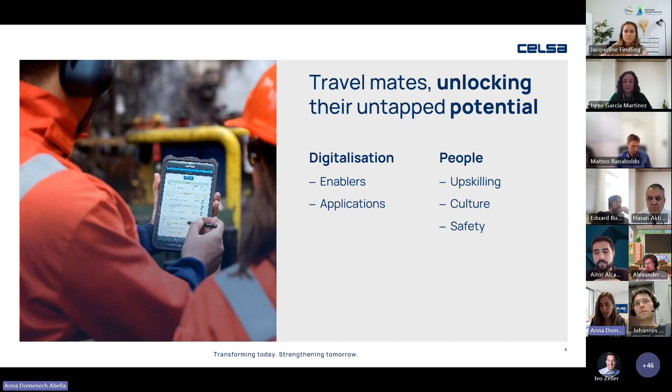But today I will focus on the other travel mate, which is digitalization, and what are the challenges we face there in this sense, and what are the opportunities it brings.

So if we look at our process, that's important to understand our digitalization strategy, and I have already mentioned that. We cover these 4 steps of the value chain, and it allows us to be a critical agent to close the loop of 2 very important value chains, construction and automotive. You will see later why it's important.

So we have categorized the challenges in digitalization in 3 categories: enablers, process revolution, and market disruption. I will go through all of them, but just as a first hint, when it comes to process revolution, we work a lot with melt shops and rolling mills because they are the ones that emit the most, and therefore the ones that also consume the most.

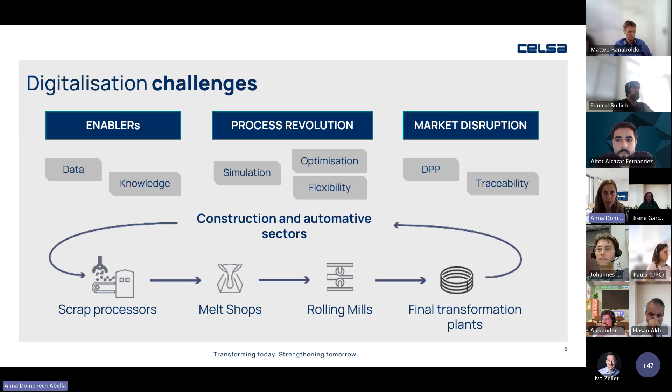So simulating new situations in which we have new feedstocks or alternative fuels consumption, optimizing the process, and also guaranteeing flexibility and adaptation in front of market disturbances is very important, more than in the other sections, in the other plants. In the contrary, when it comes to disrupting the market, traceability is very important, and the impact of scrap processors and final transformation plants is much more important because they are the end-to-end part of our position in the value chain, and you will understand it better later.

Starting now from the beginning, enablers of the digitalization for any company, but specifically for CELSA, what we have experienced in our digitalization journey is that data, this key enabler, is a tricky one. It's tricky to get the data we want, to select correctly the data that we need to extract, and also to store it in a way that later it's easy to get it and work on it.

That's one thing. And then the other one is knowledge. In some cases, at the beginning, most of all, we thought that we had to have all knowledge in the company. So that if we work on predictive maintenance, we need to define ourselves what is the software that we need for predictive maintenance, pay someone to just deliver the software and use it. And it's not the way that it should work.

We have learned by experience that knowledge doesn't need to be always inside the company. Collaboration makes things much better, much quicker, and with much more efficiency. And therefore, we have opened much more the doors to collaboration, as you see in the projects that we will be presenting today, in which data and knowledge have been key enablers and have been finally unlocked for the purpose of these three areas: simulation, optimization, and flexibility for our process.

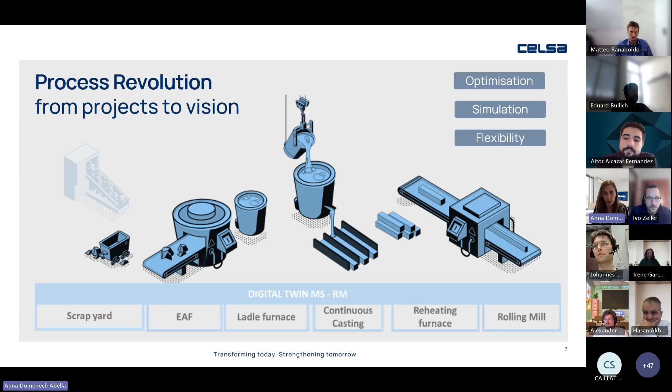Some of them are also part of the projects that we will present today, which are Alchimia, Twinghy, and Flex4Fact. If you look at it from the point of view of the three main opportunities that digitalization brings when it comes to process revolution, Alchimia represents optimization. Thanks to Alchimia, we expect to decrease by 5% the energy consumption in our factories.

Twinghy is an example of simulation. Thanks to Twinghy, we expect to understand very well what are the best blends we can use in our reheating furnace when shifting from natural gas towards hydrogen. And finally, Flex4Fact allows us to be more flexible in terms of planning and reacting to the disturbances of the electricity market.

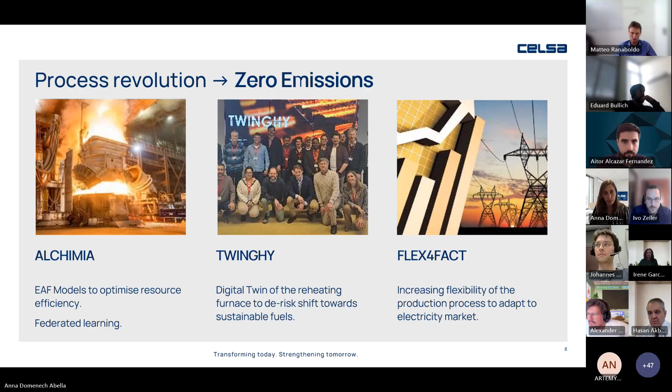And just to finish, I also mentioned market disruption. Why? Because when it comes to sustainability and competitiveness, we need to work not only from the point of view of improving the way we work, process revolution as I mentioned, but also ensuring competitiveness in the market. If the sustainable products are not more competitive in the market than non-sustainable products, it doesn't make any sense. So how do we distinguish the more sustainable rebar in the market?

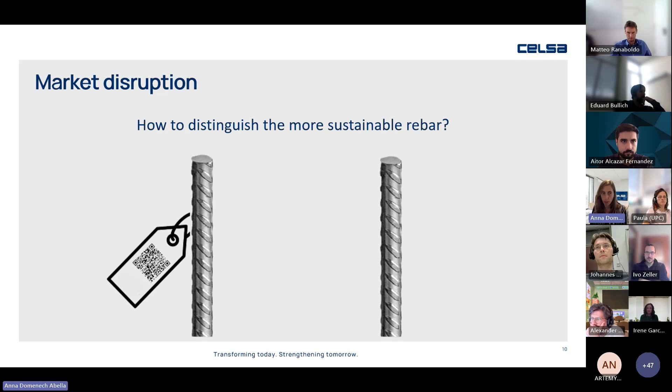Because green steel is not really green, right? Of course, the market needs to be defined by policies, by regulations, etc. But technology can also help. And this is why digital product passport and traceability is so important for us.

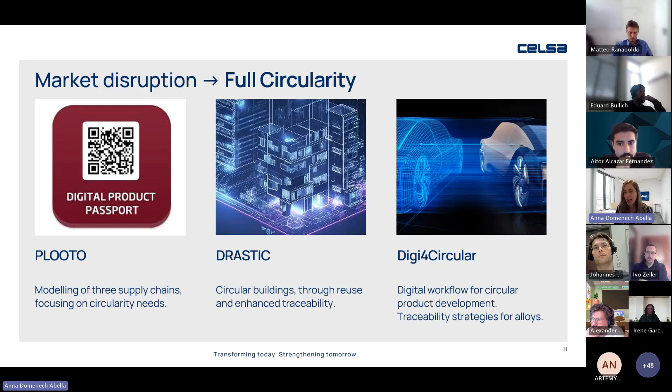So in the future, I hope not in the long term but soon, we will have a webinar on that, on the different projects we are developing in terms of enhancing traceability of the value chains and how this impacts the market for sustainable products.

So just to finish, I would like to highlight the message today, which is that when we innovate for sustainable steel, we need to think about transforming production and market as well. But today, let's welcome the transformation of the production side. Thank you.

Thank you so much, Anna. That was a really nice presentation about the doings of Celsa, and I'm quite impressed that you're so on the forefront, especially in the steel industry, of innovating and really working on making it more sustainable. And I'm really looking forward to hearing the projects now, and I hope you are as well, to dive a little bit deeper into their different approaches and how this is supporting your innovation agenda.

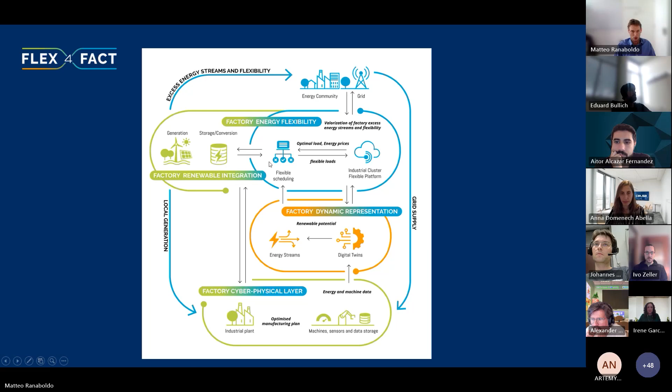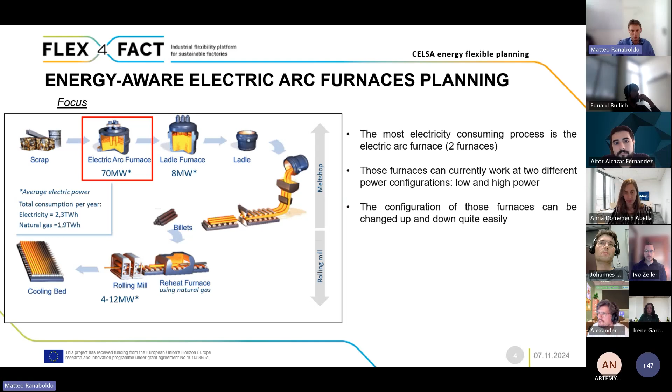Analyzing those processes, we see that there is certain flexibility, because those furnaces can work in two power configurations, low and high power, and these configuration changes can be done pretty easily by the operators and workers of the industry.

So we started basically analyzing the real consumption of those furnaces. This is part of a study done by our colleagues from ITA, the Technical Institute of Aragon. They analyzed the consumption of almost two years of data, and what we see here is the hourly average electric consumption in each of these hours for the two furnaces.

If we mix this with also knowing the power mode used in each moment, it was clearly visible that there are these two modes, the low power mode and the high power mode. It has been possible to characterize the average consumption of both configurations, and clearly higher is the power consumption, higher is the melting rate. Here we're visualizing ton per hour or casting per hour, considering that one casting is 148 tons.

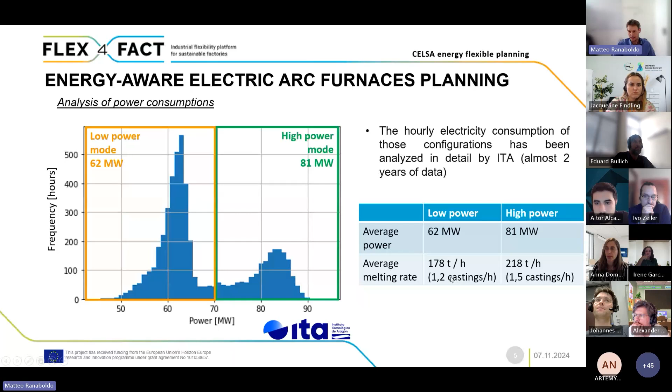Starting from that, we developed a mathematical model, an algorithm with the aim of optimizing the operation of those two electric arc furnaces, each having two operation modes with different melting speeds, knowing that this melting is organized in casting and that the planning horizon is 15 days.

In parallel, what we develop is also an electricity price forecast algorithm in order to estimate the price for the next 15 days.

So what we need to define is basically the hourly power configuration during production, and then if we need to stop a furnace, with the objective of minimizing the operation cost, which in this case takes into account both electricity and the material, with all the different constraints that resulted from talking with the industry and trying to understand the different limitations and things to take into account.

So the demand of casting clearly has to be fulfilled. There are some time slots that need to be saved for maintenance and all the other operational constraints, like the fact that it needs to stay in a certain operation mode for a certain time. Also, we want to fulfill the service that Celsa is currently providing to the grid, so it needs to assure a minimum consumption during certain hours.

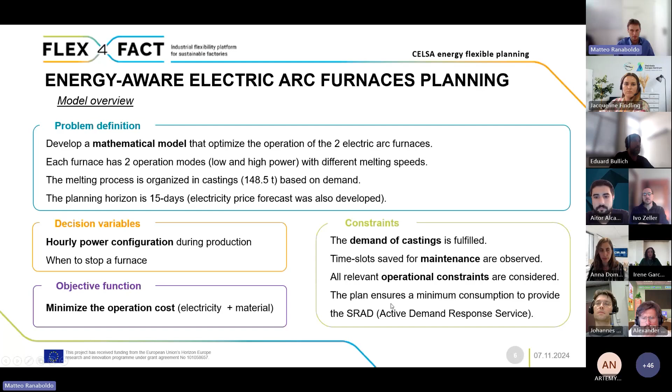Now we can see the results, in a 15-day period between the 1st and the 15th of October 2023. What we see here is basically the results of this baseline optimization model, where we see in each hour for furnace 1 and furnace 2 which operation needs to be taken. In green we see the high power mode, in blue the low power mode, in yellow if there is maintenance, and in red the stops.

So what we have done is to compare the results we obtained with our model with the real production followed by Celsa, clearly maintaining that the production is the same, because if not, it doesn't make sense. If we focus on those three days, what we see here in orange is the electric consumption of the plant followed by the industry, and in blue we have the consumption of the optimized plan that we obtain.

On the other side, in gray, what we see is the electricity price, the hourly electricity price of the spot market forecast. As we see, the optimized plan tends to clearly consume more when we have low electricity price, and this leads to a certain saving in money over these 15 days of planning.

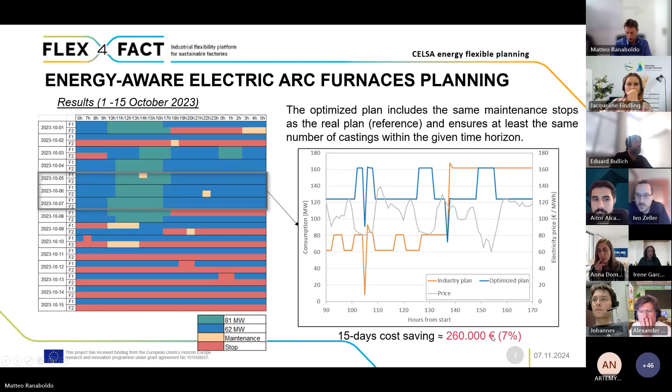Now what you may want to ask is, where is the decarbonization here? Here I try to explain the answer. What we show here in blue is basically the hourly electricity prices in 2023 in Spain, and they are plotted against, in each hour, depending on the electricity mix, certain CO2 emission factors, so kilograms of CO2 for each megawatt hour produced.

Clearly, as more renewables enter the energy mix, the energy price goes down, because the fuel is free in this case. And on the other side, the CO2 emission of the energy mix also decreases. That's what we've seen here - there is this direct correlation between the spot market prices and the equivalent CO2 emissions.

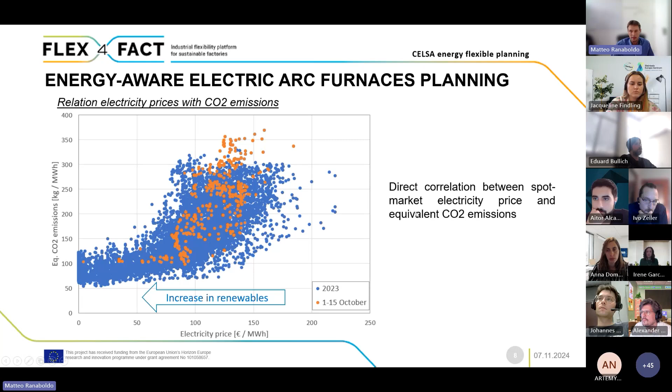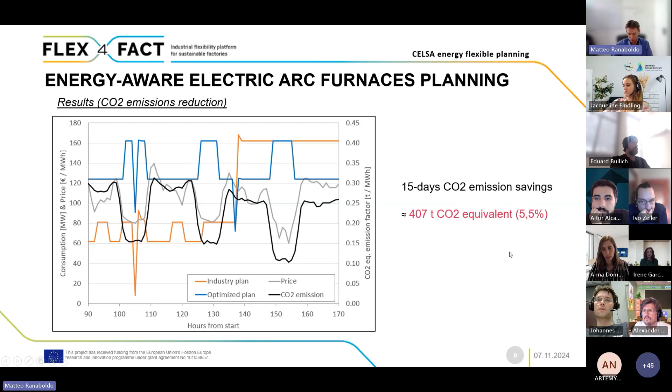So basically, if we go back to the previous results, here is the same chart. We just added in black the CO2 emission factor, which as you see is following pretty much the price. So even if CO2 is not explicitly included in the model, we see a significant reduction in CO2 emissions from the grid consumption, around 400 tons, which is around 5.5% with respect to the industry plan.

The next step is the generation of flexibility offers. So before talking about that, I want to introduce what we mean by flexibility in power systems. It's basically the ability of the power system operator, generation, or storage asset to change their routine operation for a limited duration, responding to an external request, in order to maintain a constant balance between generation and consumption.

So if we look at this chart, if we focus on the left part, we see that traditionally this flexibility comes from the supply side. If we have thermal power plants, they can increase or decrease their production in order to adapt to the consumption. They are flexible power plants.

But if we move on the x-axis to the right, then if we increase the level of renewables such as wind and solar, that generation does not have any flexibility. So the supply side flexibility is decreasing, while on the other side, the total requested flexibility by the system is maintained constant or can even increase. So this results in a flexibility gap that needs to be filled from other sources.

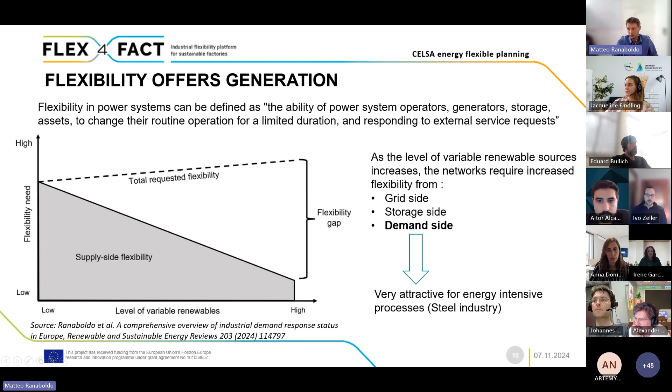And finally, we have the demand side. It becomes very attractive because it doesn't require much infrastructure and is especially attractive for energy-intensive processes like the steel industry. So how this industry can provide this demand-side flexibility is by entering, for example, the flexibility market, such as ancillary services markets.

In Spain, I won't go into the electricity market in depth because it's a huge topic, but just to mention a couple of markets that are very interesting for the steel industry or for CELSA: the tertiary reserve or replacement reserve, where basically there are daily auctions with a minimum bid of 1 megawatt hour and offer duration between 15 minutes and 2 hours, with a notification time of 15 to 30 minutes before activation.

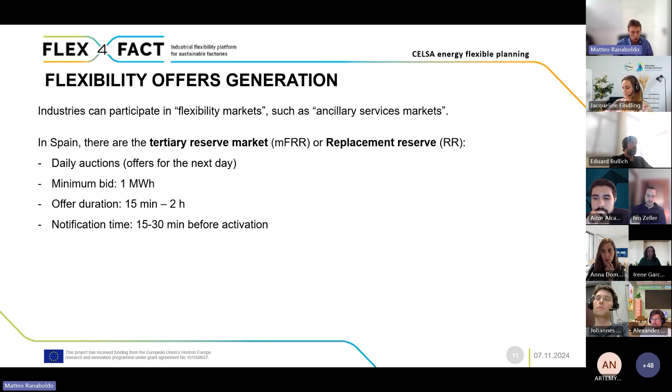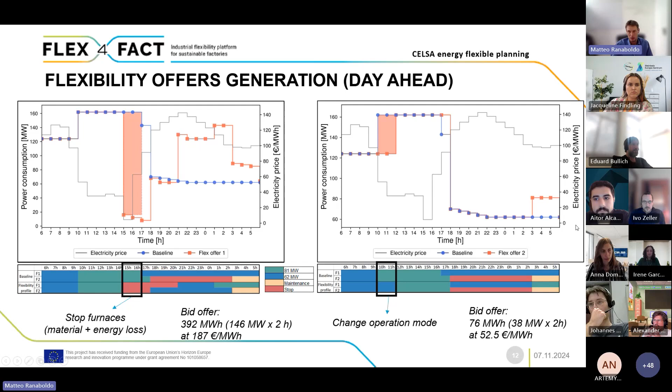Okay, that was basically it, what I wanted to explain, just to give an idea of the current status where we are. Basically, the algorithm for this baseline or the optimized plan and for generating those offers have already been developed and tested. And what we are working on now is the software interface and connection that are actually being developed by We Plus, who are also developing the energy flexibility production scheduling platform where this algorithm will run, with a user interface as nice as possible.

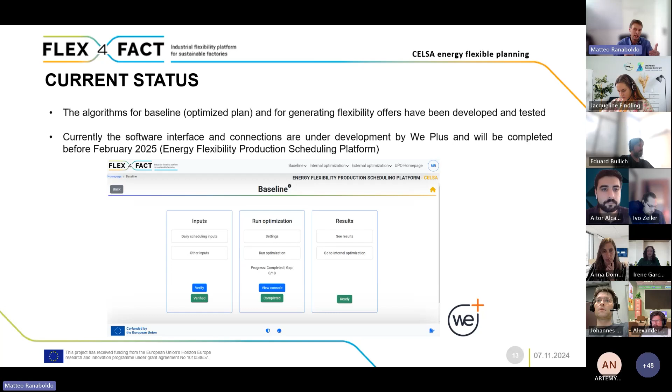And this is the platform that will then interact with the industrial cluster flexibility platform, which is the one related to the relationship with the market, aggregating the offers from different industries and sending them to the market. So thank you very much for your attention, and looking forward to any question or any doubt you might have.

Thank you so much for this enlightening presentation. I think it became really clear that flexibility and the understanding of energy usage leading to this flexibility really offers the chance to adjust your production in a way that saves energy, or redistributes energy to save costs and CO2 emissions. So I would ask if there's a pressing question right now from somebody in the audience.

Otherwise, think about this. This is the first approach. Think about it, write it down, and maybe there will be some discussion in the Q&A afterwards.

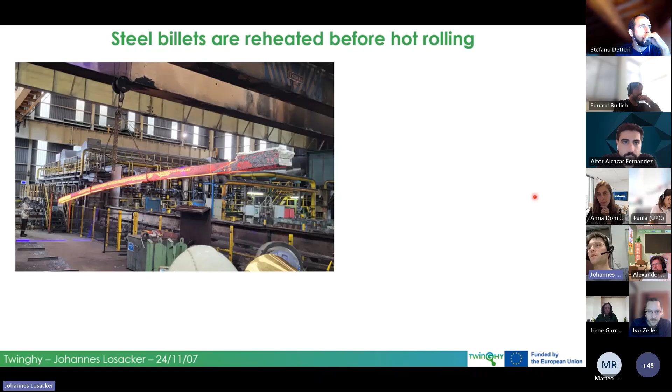So this time it's not about the electric arc furnace, but rather about the reheating process of steel. This is taking place at the hot rolling mill. Here in this picture, you can see some heated billet. It got heated in the walking beam furnace in Celsa 3 that you see in the background. Here we did some special measurements, that's why it's about to be removed by a crane. Usually this hot reheated billet will just stay on the roller table and go straight to the hot rolling mill, where it gets its final product shape.

So this reheating process is taking place at Celsa 3 in a so-called walking beam furnace. There are several beams, stationary and walking ones, and they do a kind of stepping pattern to move the billets through the furnace. Indicated by this black arrow, you see the billets entering the furnace chamber, shown in yellowish here from the top view. The cold steel billet enters the furnace down here, steps through the process going upwards in this figure, and leaves after about 3 hours, hot and ready to be hot rolled. This furnace is operated by burners.

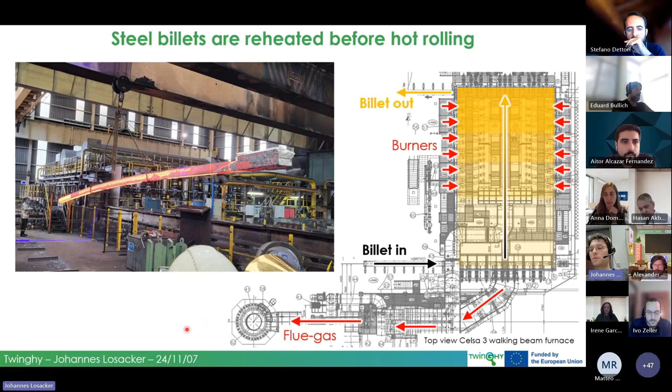You see them depicted here by the red arrows. It's 24 burners in total, 12 to the right, 12 to the left side. These burners burn into the combustion chamber, produce hot flue gases that transfer their heat to the billet, and then the flue gases leave this combustion chamber to the central recuperator, where the off-gases, still hot, preheat the combustion air for some energy efficiency increase. Then the cooled flue gases leave the system via the exhaust through the chimney.

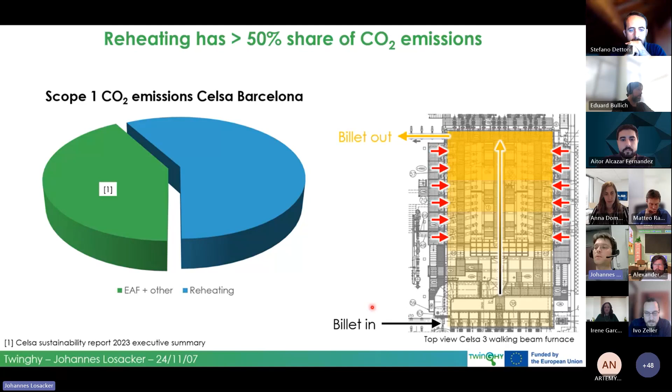So this process is responsible for over 50% of the CO2 emissions at the Celsa 3 site. This is regarding scope 1 CO2 emissions, the emissions actually emitted on site. In this diagram it's more or less a rough estimation, I got some figures from Celsa's Sustainability Report from 2023. So this reheating process really has a great share of scope 1 CO2 emissions, and this is due to the fact that this furnace is operated on natural gas only.

To give you some basic figures of the furnace and process, it has a nominal production rate of 180 tons of steel reheated per hour, though it usually runs a bit lower, like 100 tons per hour. Steel billets enter the furnace at about ambient temperature, usually around 20 degrees Celsius, but sometimes, coming straight from the caster, they may not have cooled down entirely, having temperatures like 300 or up to 400 degrees Celsius. They get loaded into the furnace and heated up to about 1,200 to 1,220 degrees Celsius for hot rolling, using an installed power of 79 megawatts of natural gas. This results in specific CO2 emissions of about 60 kilograms per ton of steel reheated.

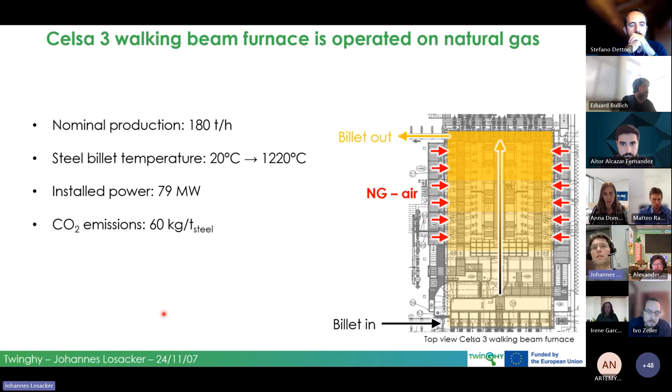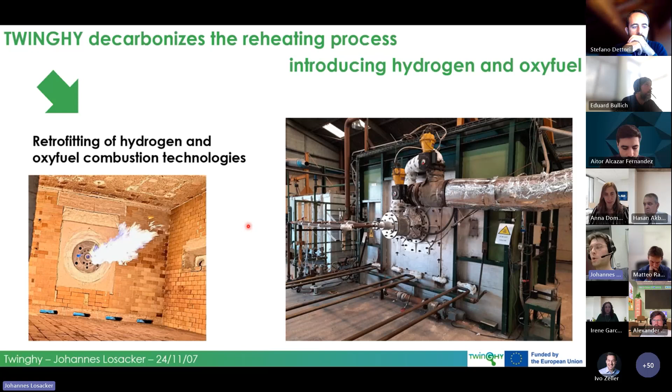So the scope of Twinghy is to at least partially decarbonize this reheating process. We follow two major pathways to do that. The first and arguably most important one to reduce emissions is the introduction of hydrogen and also oxy-fuel. We are retrofitting the furnace in parts with newly developed burners capable of firing hydrogen. As most of you might know, firing hydrogen doesn't produce any CO2. So that's our way to go.

Fuel flexible means they are able to operate on hydrogen and natural gas both, and actually any blend in between these two. In the heating zone, which is one of 3 furnace zones consisting of 8 burners, these are getting retrofitted in the furnace, and this heating zone is actually the one with the greatest share of energy contribution. So it's quite reasonable what we are retrofitting here, as it's able to be operated on hydrogen later on.

Of course, we have to be able to supply the hydrogen to the furnace, which is actually a major challenge because we don't have a grid like we do have for natural gas. So our project partner Nippon Gases is taking care of the infrastructure required to get the hydrogen to the furnace, which is done within this project via trucks. At least 2 trucks are able to connect to the piping system that is then introduced by Nippon Gases to the furnace. And then we are able to operate the furnace, at least for a couple of hours, for our test trials on hydrogen.

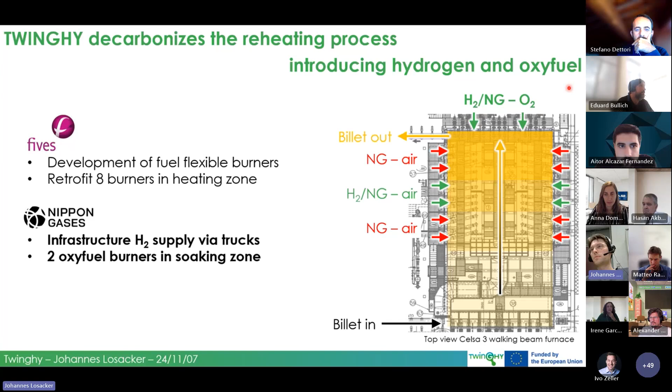Moreover, Nippon Gases is introducing 2 additional burners, and one special thing about these burners is that they are operated on oxy-fuel. They are introduced at the back wall of the furnace, where right now there are no burners. These are just additional for research purposes. The nice thing, besides the fuel flexibility again here, is that they use oxy-fuel - pure oxygen instead of air for combustion, which essentially makes the process more efficient because you don't have to heat up all the nitrogen contained in the air. So the flame, the combustion itself, the flue gases are actually gaining temperature from that, and this in turn promotes the heat transfer to the product. The only drawback, of course, is that oxygen has a certain price, while air is basically for free.

So this is the one pathway, the actual retrofit of this furnace. And of course, we want to answer some questions. What are the consequences of the fuel switch going towards hydrogen, at least partly towards hydrogen? We want to see how the process efficiency is evolving.

One important question is about scale formation. For any of you who might not know, in this reheating process, the steel product is partly oxidized, so that's actually steel mass that we are losing within the process. We don't exactly know to which extent right now, but that's why we're investigating how the altered furnace atmosphere from the introduction of hydrogen - fewer CO2 content, higher water vapor content - will affect the scale formation.

Then another material that's in contact with the furnace atmosphere is the refractory - that's like the lining at the inner furnace wall protecting the walls from the heat. We expect some interdependency with the flue gas atmosphere there as well. Then we have one important point, which is pollutant emissions. Mainly we focus on NOx emissions, because the higher flame temperatures of hydrogen flames make it a bit uncertain how these emissions will evolve - higher, lower, whatever - this is to be investigated within the project.

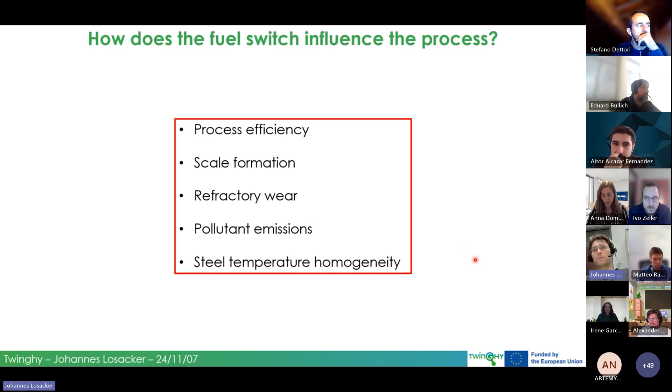And then in the end, we have the quality of our process. We want to reheat the steel billets, so the temperature distribution within the billet is what we're aiming for. As the heat transfer due to the fuel switch might change, we're investigating the temperature distribution in the billets, how we might have to change furnace control or other parameters to remain at the same quality of heating. So that was the first pathway, so to speak, the actual retrofitting of the furnace.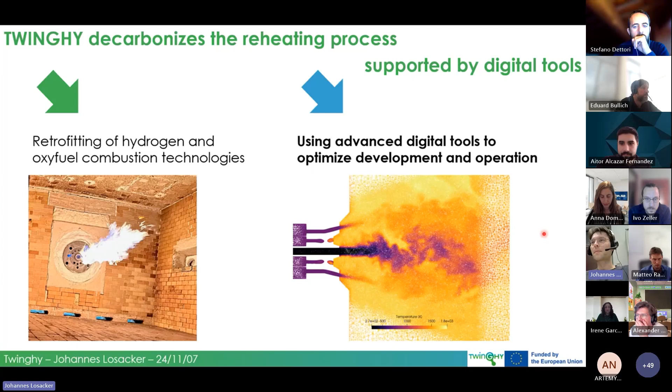The second aspect we are focusing on is the use of digital tools. Here you see some nice CFD pictures standing for that. I want to start by motivating the use of digital tools a bit by showing you what kind of data is generated at this furnace.

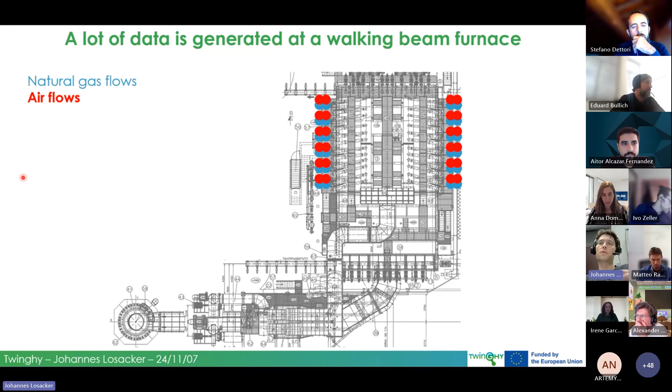Even though this furnace has been operating for 15 years now, it's equipped with quite a lot of sensors. For each and every burner, we have the natural gas flows recorded all the time, together with all the air flows going into our system. We also have a bunch of thermocouples giving us the gas furnace temperatures within the furnace chamber in the different heating zones, and also in the off-gas channel, the off-gas recuperator.

Additionally, we performed some measurements. We've been there at the site for about a week. We recorded some off-gas, flue gas compositions at different accesses into the furnace chamber and also at the chimney. Here I brought some picture with a quite nice view from up the chimney over Castelbisbal.

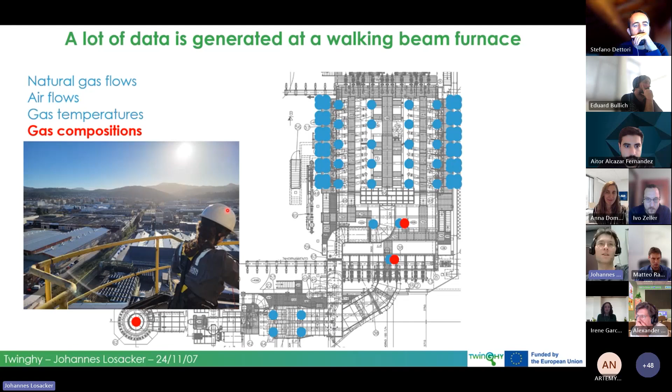Within this week of our reference trials, where the furnace was operated on the usual natural gas fuel, we also did some investigation of the steel temperature. What we always know is what kind of temperature the steel billet has when it enters the process and when it leaves the process towards the rolling mill.

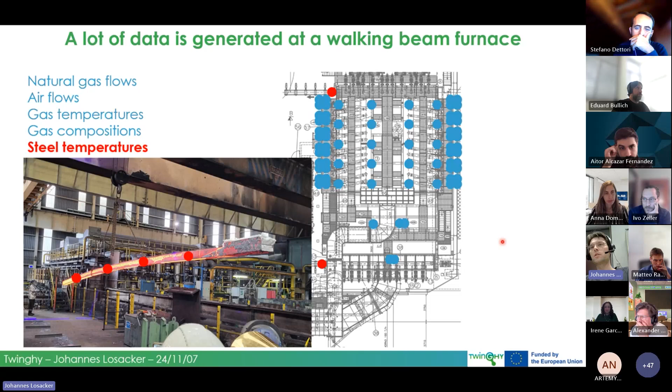But within these reference trials, we also performed a so-called instrumented billet trial. This is the picture I was showing you earlier. It shows a billet being removed from the process, and you see something attached here - that's a data logger connected to about 25 thermocouples placed at different sections along the billet and at different depths. So in the end, we have a transient temperature profile, and now know how the temperature distribution within the billet is evolving throughout this process.

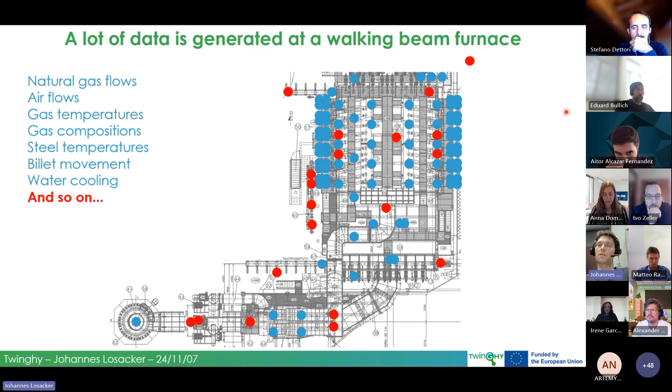Then we have all kinds of data characterizing the movement of the billet through the process. We know about the water cooling, how much energy is extracted from the furnace by the flow of water, inlet and outlet temperatures, and a whole lot of other signals. My point here is that we have lots of data and information of the operating conditions of this furnace. We know a lot of things, but we don't know everything, for instance, about the details of the flames.

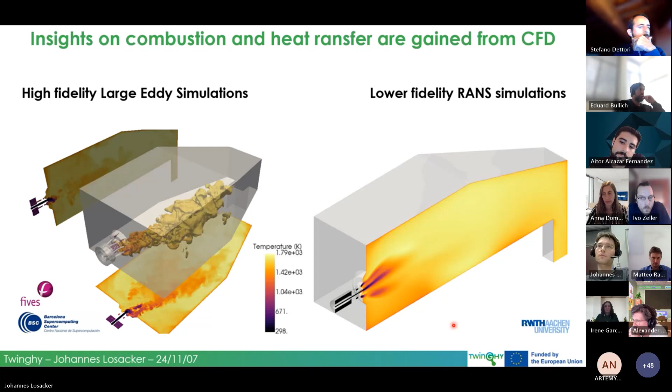Combining these kinds of information, our partners from the Barcelona Supercomputing Center add everything up and build a digital twin out of this data. We have chemical reactor networks - that's some 0D simulations they perform. Then they do machine learning on all this data I showed you before, generated through long periods of operation at this furnace. They basically do time series predictions and explore various models for that. Combining the insights we gained from the CFD of single burners and the entire furnace, all this gives us a lot of insights, and that's what one may call a digital twin in the end.

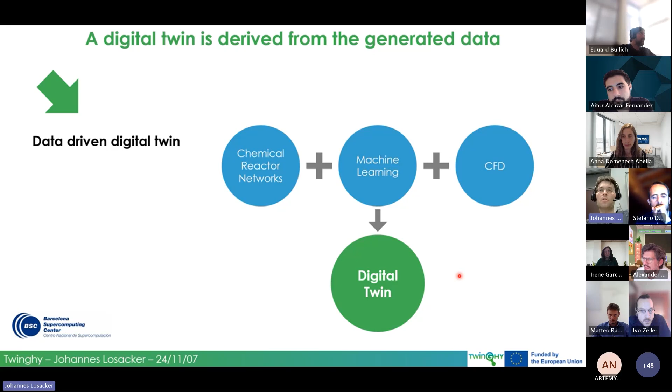A second, more classical approach of a digital twin or process model is developed by another project partner, Swerim in this case, and they are doing finite element analysis of the system. They do a discretization and derive this model from first order physical principles, calculating heat flows, radiation from the flame, from walls, gas radiation.

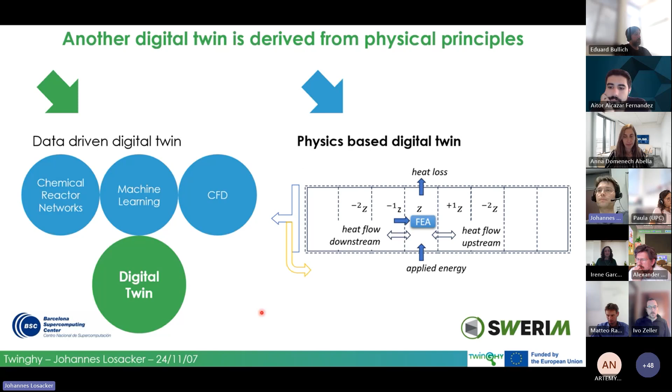Convection and so on, this is the classical approach. One aim of this project is to compare these two approaches to a digital twin, and of course we want to answer some questions using these digital twins, and know which method is preferred to answer which question. So here again, it's about how the heat transfer works, how the fuel switch influences heat transfer in our system, and what's the general response of the furnace if we change burner states or operating conditions.

If we have a model that properly describes the whole process, we want to be able to get information out of it about the most economical operating strategy, which kind of blend of hydrogen or natural gas, to what extent we should use oxygen as the oxidizer. In the end we could also use these tools to assess the most ecological operating strategy for the furnace.

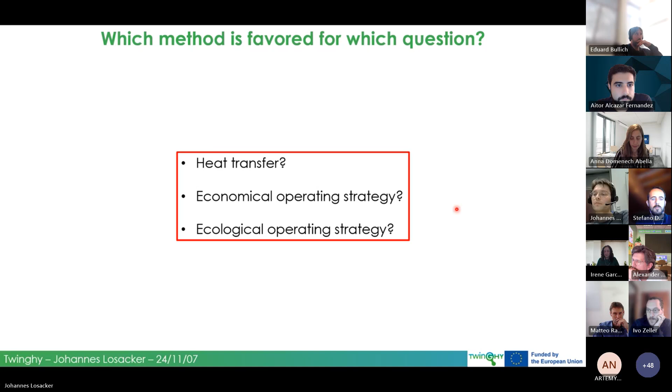This project has progressed for almost 2 years now, we are in month 22 out of 54. We already completed some actions, first of all the development of the fuel flexible burners. This is done already, so these burners are now getting manufactured. And then we performed some reference trials where we got deep insights into the process.

We did some lab trials about the materials to see how the interaction with the altered flue gas conditions will be, referring to the refractory material and steel samples. We also placed some of these samples into the furnace, but we can access it only during maintenance, so there are samples placed in the furnace right now that we'll be able to analyze later. The next major actions will be the actual retrofit of the newly developed burners and the oxy-fuel burners into the furnace.

Then it's time to actually operate the furnace on hydrogen. This will probably last for a couple of hours when we have 2 trucks of hydrogen available, so we hope we get some nice data out of these trials. And in parallel, we are about to develop and in the end compare the digital twin approaches, to have some conclusions on which modeling procedure is preferred for which kind of question.

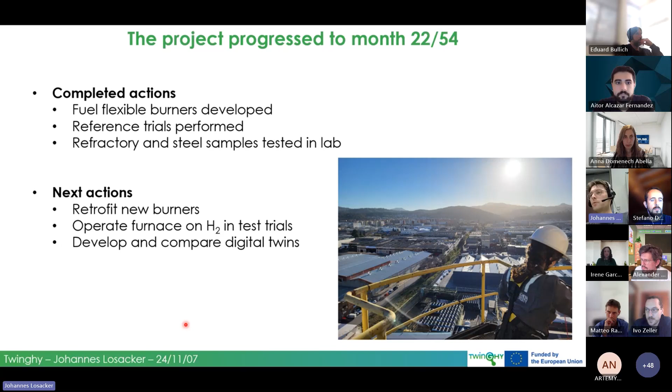And that's in a nutshell the Twinghy project. Thank you for your attention.

Thank you very much, Johannes. That was really technical, I see we really went deep into the workings of the furnace and the engineering parts of the project. But thank you very much. This seems to be really integrated into the manufacturing hardware of Celsa as well in this case, and already changing the way the steel is produced there. So thanks very much.

Is there any direct comment or question in the audience right now that's pressing on your lips? I would hate to take away. Yeah, Ingeborg? Hello.

Hello, my name is Ingeborg, I'm a research scientist at Sintef Energy. First of all, thanks Johannes for a very, very thorough presentation, it's really, really nice to see. I was wondering, for the hydrogen supplies, have you considered including pipeline supply?

I'm afraid I didn't get the last part of the question. I was wondering if you have considered including pipeline supply of hydrogen. Not as far as I know, we rely only on trucks to supply the hydrogen for our test trials.

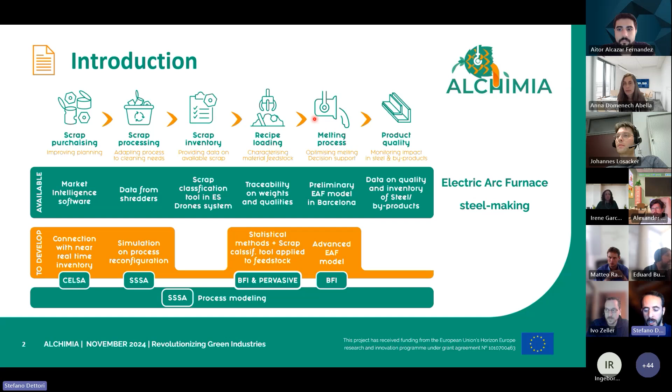Then we have the EAF process where we can optimize several things, such as carbon usage or the energy carriers. And finally, the last step is to optimize the refinement of the steel, as I said before, by adding, for example, the ferroalloys in the ladle furnace.

And in fact, the ladle furnace is, let's say, the objective of this presentation. The objective of the project is actually the development of a decision support system for optimizing, in fact, the recipe for the steel production.

In this decision support system, the operators can, for example, set a set of objectives that they would like to minimize or maximize. They can also set the parameters for the optimization, but also, for example, some characteristics - in this case, for the ladle furnace, for the ferroalloys in terms of chemical contents, and also prices of materials and the energy carriers.

And thanks to these data entries and a set of models and optimization tools that are integrated in this decision support system, it delivers to the process operator or plant manager a set of results - for example, an optimized recipe for the ferroalloys addition in the case of the ladle furnace, also optimized consumption of energy and argon for the stirring of the steel.

And finally, it also shows what will be the characteristics of the final steel at the end of the ladle furnace process, in terms of, for example, the final chemical composition of the steel - if it meets the target composition - and the final steel temperature.

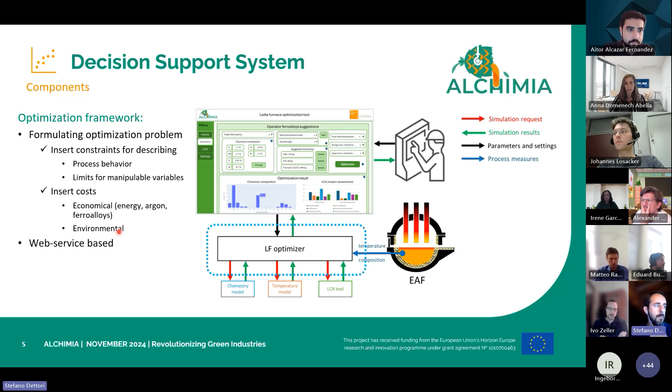Finally, we also insert a set of costs that describes the balance in terms of economic impact, taking into account the energy consumption, the argon consumption, the ferroalloys usage, and also the costs related to the environmental impact. The interesting idea in this project is that we exploit a quite powerful tool, the LCA, the life cycle assessment methodology.

This methodology allows us to calculate and assess the environmental impact for several categories. For an EAF-based steel-making process, the most relevant categories are the climate change, the acidification, the eutrophication in terms of fresh water, the photochemical ozone formation, and ozone depletion. But we can calculate several categories.

This calculation of a set of environmental impacts, which are numerical values, is calculated starting from the usage in terms of materials, but also energy, water, and so on.

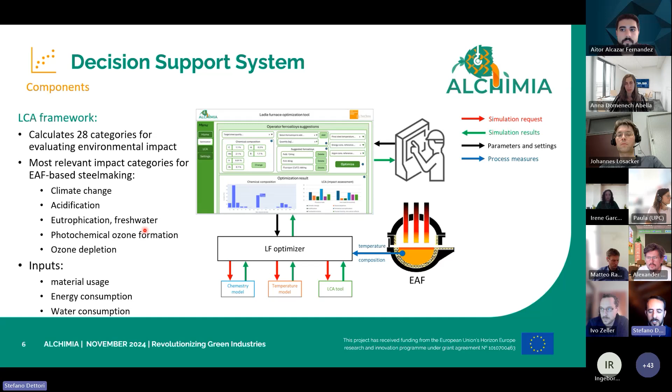As I said before, the decision support system integrates a set of models that describes the ladle furnace behavior, exploiting neural networks for forecasting the final chemical composition and the final steel temperature. These models are trained through real data of the plant, the specific local plant where we deploy the decision support system.

But the interesting fact of this project is that we are using and exploiting federated learning, which creates a sort of global model that integrates all the knowledge of several plants that collaborate to create an enhanced global model. This will be explained better by Aitor after my part of the presentation.

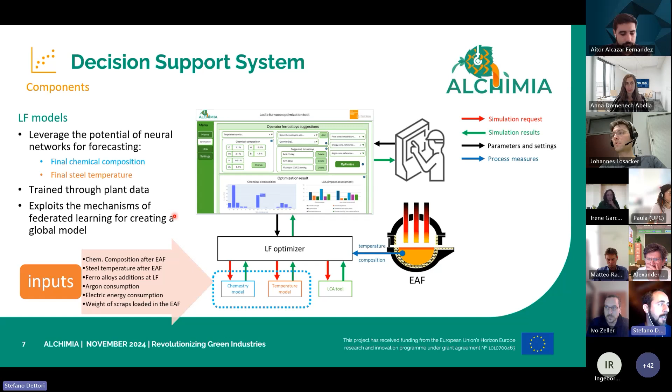These models exploit a set of inputs, for example, the chemical composition during the tapping in the EAF, so the chemical composition of the steel, the steel temperature, ferroalloys addition, the argon consumption for stirring, the electrical energy consumption, and also the weight of the scraps loaded in the electrical furnace.

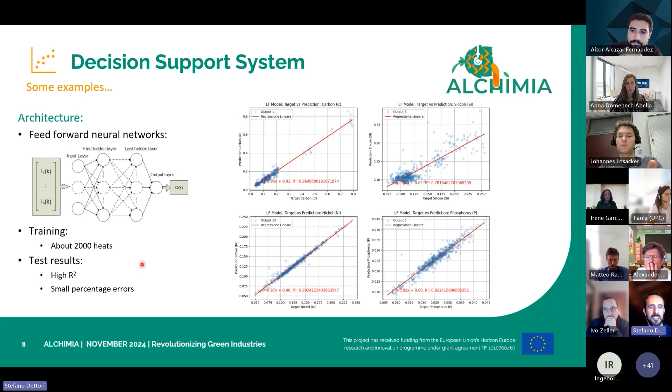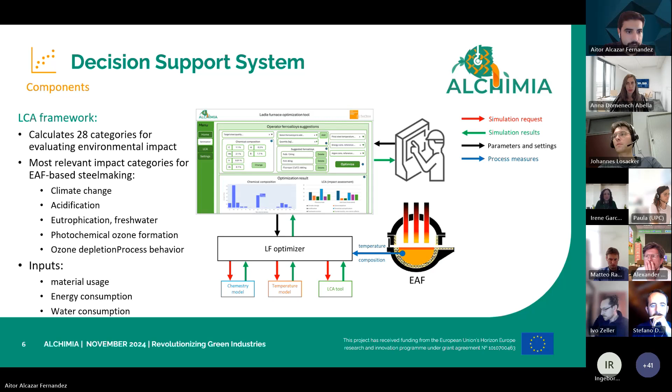Okay, we were on here. On here. Okay, so if we take this information that was presented by my colleague Stefano...

The idea of having only a single plant working on forecasting and providing these improvements in terms of artificial intelligence and digitalization, we can find a way to provide the rest of participants, the rest of industry, with a way to work collaboratively so that they can create what is called a global model. For this purpose, in ALCHIMIA, we are working on federated learning principles.

As an introduction, federated learning is basically a way to extend the machine learning approach where models are trained collaboratively across decentralized devices. Following this, we ensure that we keep the data and content private for the rest of the industries, and we only exchange encrypted models so people can create a model that will be consumed by all in a positive way.

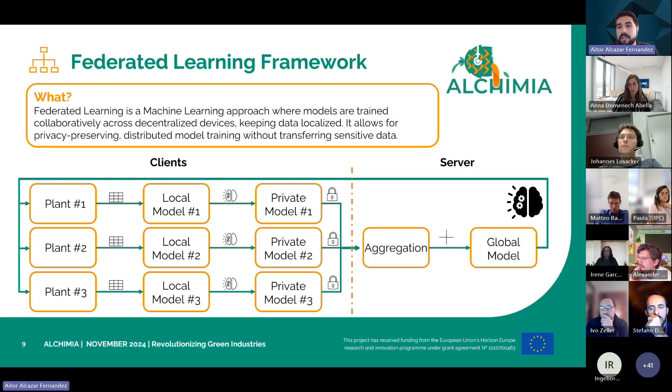This model comes again to the clients so that if they have any changes in terms of data, or would like to change something locally, this can improve the global model as well, working in a feedback way.

Our framework is aimed to provide a modular tool that allows us, as a consortium or framework provider, a way to implement these federated learning pipelines in a customizable way.

This framework ensures data privacy, as previously commented, by sharing only the model updates, not the data of the companies or industries between the devices, safeguarding the sensitive information that shouldn't be shared with each other.

It supports seamless integration across the distributed infrastructure. It comes from wherever independently and then is aggregated into a single centralized point. It also implements governance mechanisms so we can assign roles or control access, enhancing the security when gathering these global models.

A short hands-on of how this is easily applied in a modular way: we only need a cluster with dependencies like Docker and kubectl installed, a few files, and then applying the deployment, we are able to deploy the federated learning framework both on the client and server, and start working, improving this global model.

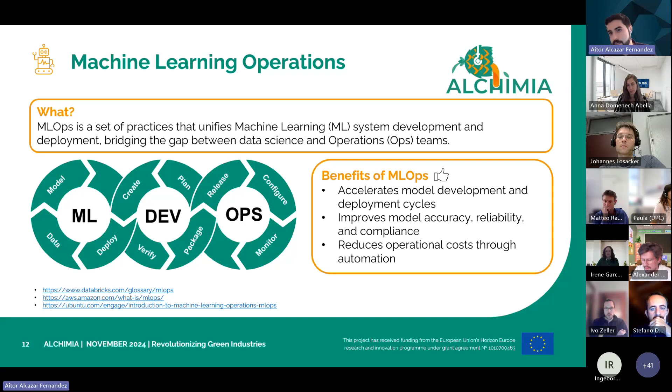It is extracted, transformed, and loaded into the ETL pipeline. Then we create the training pipeline, providing those machine learning models mentioned before by Stefano.

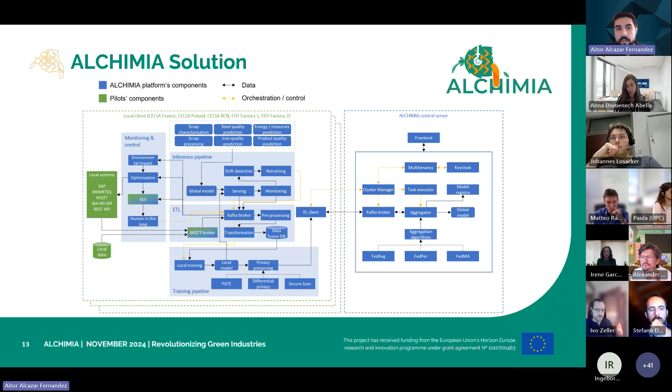Apart from that, we have another pilot to be mentioned, which is Fonderia di Torbole, that can join as well as an extra company to provide their data so that they work inside this federated learning framework as a whole inside this fleet. And just to mention that this design is aligned with the human-centric focus.

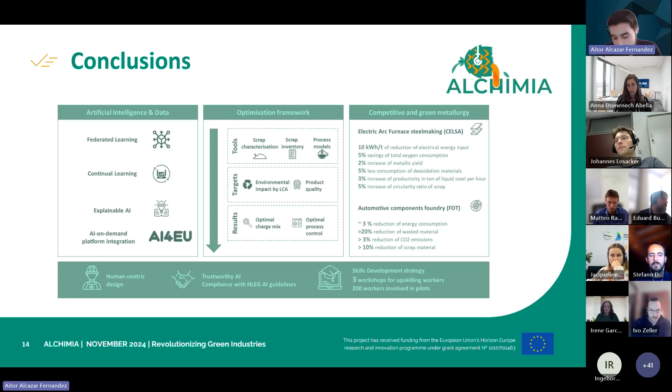It is compliant with the indications from Trustworthy AI from the European Commission, and we developed different development strategies, such as 3 workshops and having 200 workers involved in these pilots, focusing on the human-centered design. And that was all from our side.